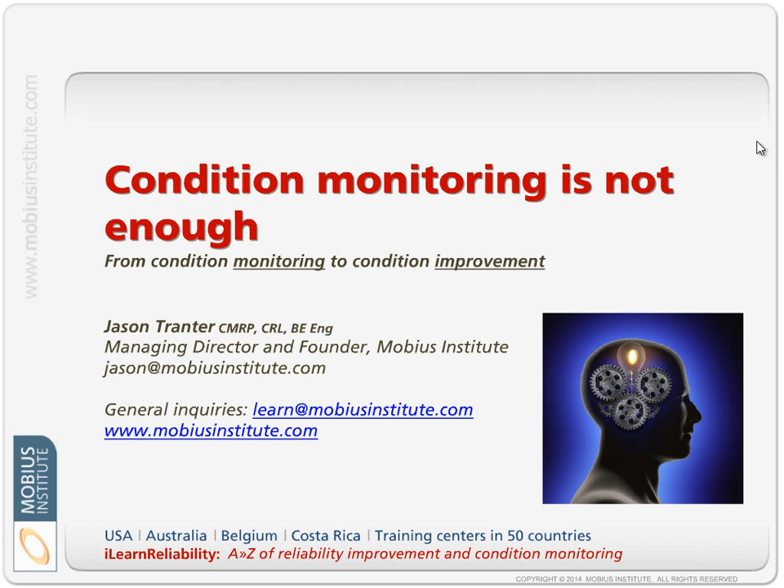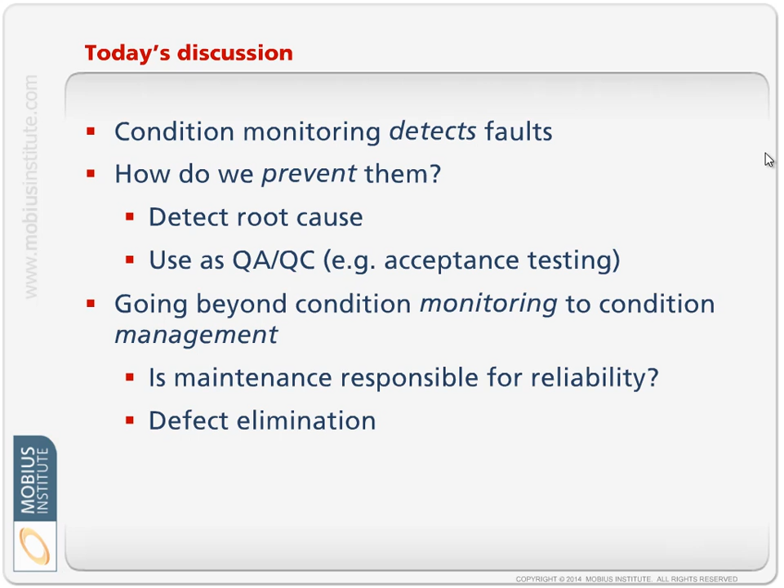In this presentation we're going to quickly summarize condition monitoring, the benefits of performing it, and its traditional role. Then we'll look at not only detecting faults but how we prevent them in the first place. We'll look at root cause failure analysis, using condition monitoring as a quality assurance and quality control process, and then we'll look at how we go beyond just condition monitoring to condition management, and explore the topic of defect elimination.

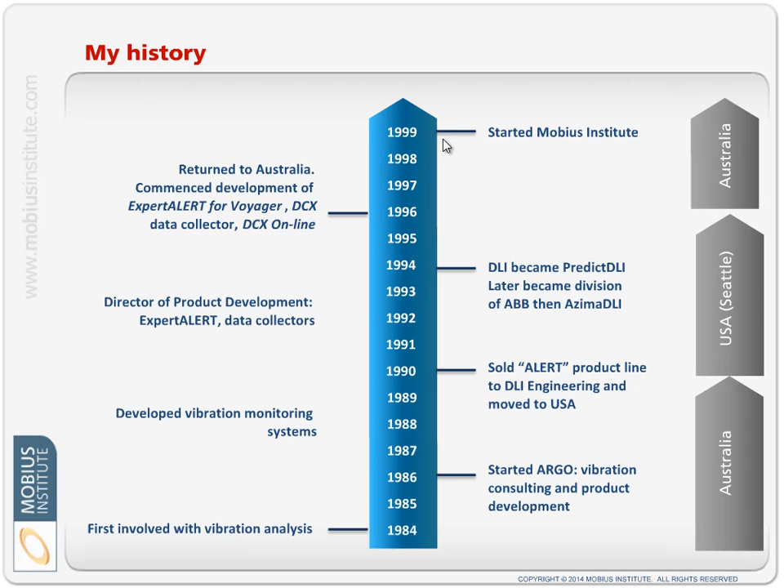Very briefly, so you understand where I'm coming from, I've been involved with condition monitoring since 1984, in a variety of roles, from running my own company in Australia to working for a company that developed condition monitoring systems, to starting Mobius Institute, which is involved in providing training in the area of condition monitoring. Our business has been going 15 years, and over those years we've developed various training courses related to condition monitoring and reliability improvement.

Particularly in more recent times, we've taken our reliability improvement ideas and put them into a product. The point I'm really trying to make is that over those 30 years, I've seen a lot of companies try and run successful condition monitoring programs, and a lot of companies really struggle to run their condition monitoring program as well as perhaps they should. They're not getting the returns they'd hoped from condition monitoring, and we'll explore a couple of those points as we get through this presentation.

The other major observation through this time is that most people really focused on detecting faults and providing a warning that a machine was failing, but not necessarily focusing their attention on the area where they would get the greatest return on investment, and that is on eliminating the root causes of those faults that they were detecting with their vibration analysis systems or infrared systems and so on.

So, condition monitoring. What we're really trying to do is minimize risk through early fault detection. As you're probably aware by now, rotating machinery, electrical equipment, and other process equipment give off a lot of telltale signs that there is a problem developing, and if we catch those signs in enough time, we can then react to them.

But in general, if time is being spent to inspect a piece of equipment to determine its condition and the necessity for maintenance work to be performed, corrective actions or whatever, that to me is still basically condition monitoring. We're monitoring the condition so that we can react, and that's a key word here really - we react if there's a problem detected. And performance monitoring certainly fits into that - if we can see that the pressure or flow is not adequate, well, that's a condition that needs to be remedied.

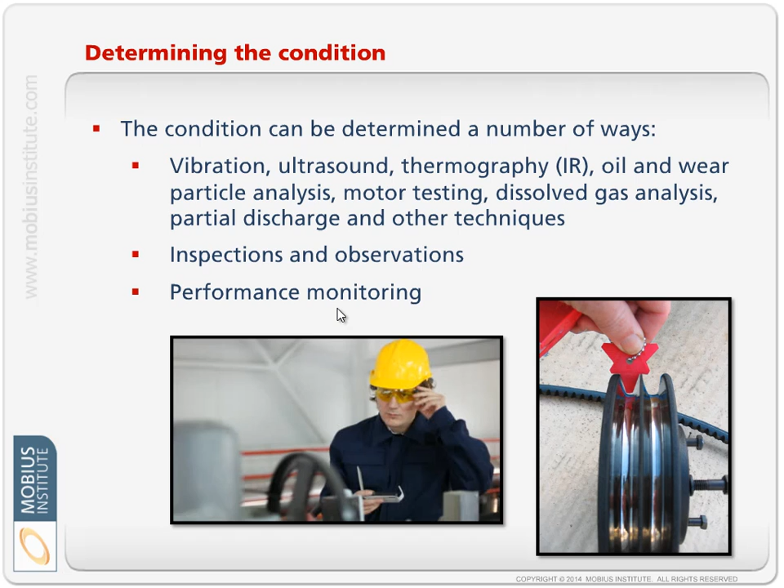Okay, the basic principle behind condition monitoring is that we will run for a certain period of time when the equipment is running in its normal, healthy state. We could say that it's running defect free, but let's just say that the defects in the system, the inherent unreliability, hasn't yet caused any faults to begin to develop.

Other technologies are going to pick it up earlier, but of course it depends on the failure mode and the type of equipment. What we really want to do is pick it up as early as possible. The earlier we pick it up, the lower risks associated with the equipment and the lower cost of dealing with the problem. We have more time to plan it when it is convenient for us to deal with the failing bearing or whatever the problem is.

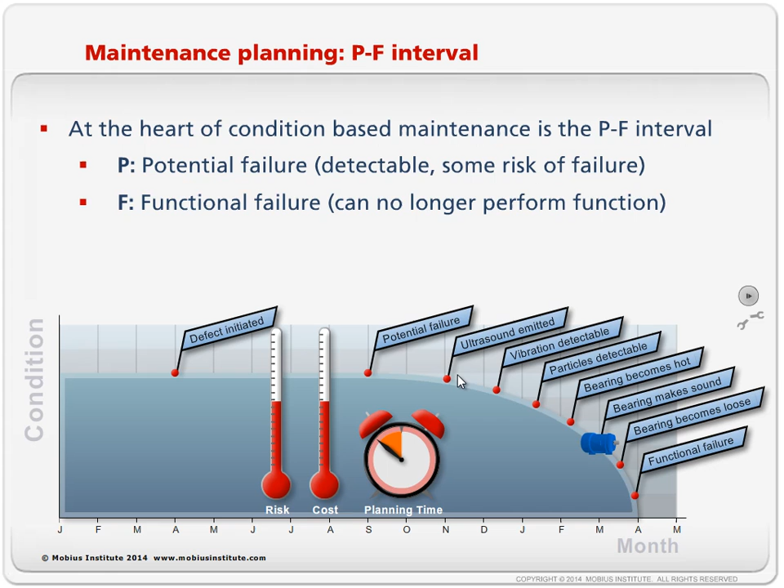But that's the core principle behind condition monitoring, and as long as we take enough measurements to at least plan to take two within this PF, F being the functional failure, if we plan to be taking two measurements in that period, then we should detect it and be able to respond. We may take more measurements during that period, and that gives us a higher likelihood of detecting it earlier. And then the other key is to use those technologies properly, but that's not really the point of this presentation.

So, what are we doing with condition monitoring? It is there for fault detection, not when it has catastrophically failed, of course. We're trying to get that early warning. We can use that information to improve our maintenance planning.

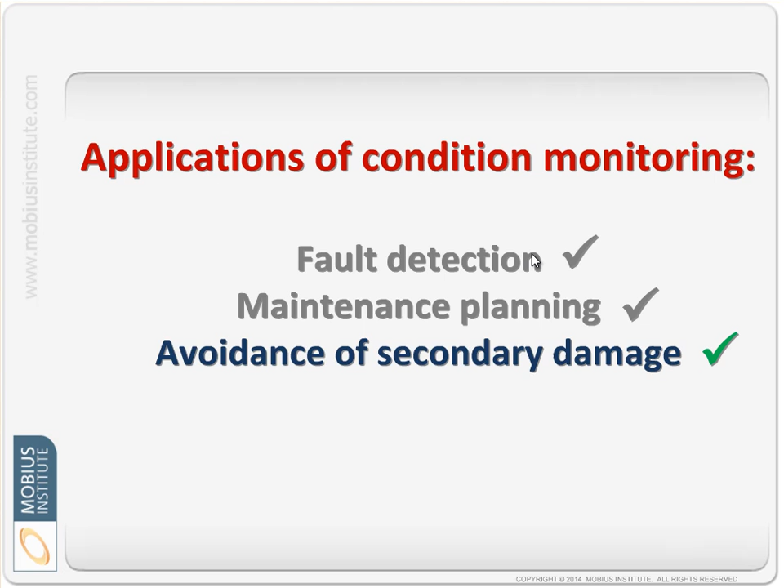We can avoid secondary damage or collateral damage. If the bearing failed, maybe the shaft would be damaged as well, or a seal would be damaged, or there's secondary damage, and we get to avoid that.

If we're doing a good job, we can reduce our inventory of spares because we have more confidence that we will detect it early enough that we can perhaps order the spare that we need, the replacement piece of equipment that we need or part, and we know we have enough time to get that into our stores. So rather than having it on our shelves, which is costing us money, and there's the potential for that part to degrade over time, we get to save some money.

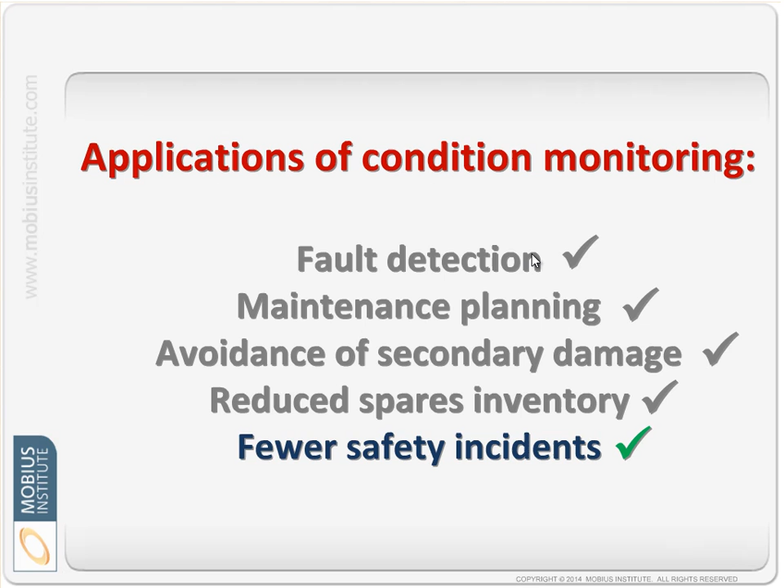And there are fewer safety incidents as well, both in terms of the equipment failing, which can have a ripple effect both from a safety and environmental point of view, but because we can plan our maintenance better, we'll have more time to plan the maintenance and we'll have a better idea of what's wrong with the machine. There's less time spent with the machine, and that reflects an improved safety situation.

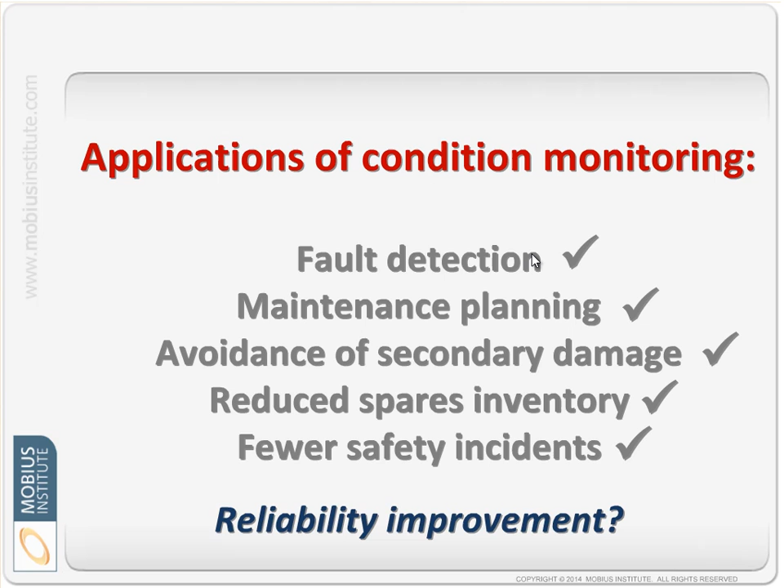But the question is, what does all of this have to do with reliability? Most people feel, well, condition monitoring, and I'll put the emphasis on the word monitoring, does it improve reliability? Well, certainly if you look at it from the point of view of, are we having as many failures as we used to? Is that your sole measure of reliability? Well, from that perspective, yes, we improve reliability of the plant.

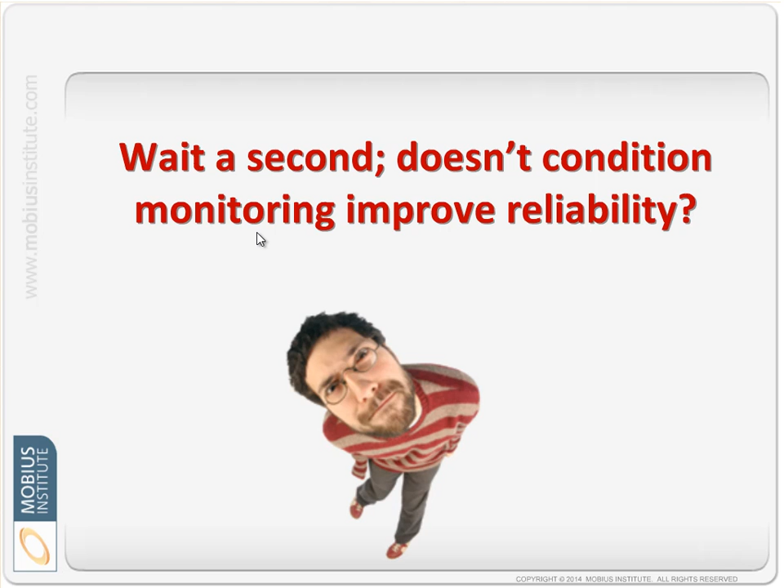We can make plans because we have a higher likelihood of having less downtime, greater availability, and so on. But are we improving reliability? What have we been discussing so far? We're really managing failure. We are detecting problems, or fault conditions that for the most part just should not exist.

Okay, if you've been running the machine for the last 15 years and finally we detect a bearing fault or something, we say, hey, it did a good job. We're happy with this situation. But that's usually not the case. It's not 15 years later that we're detecting a problem.

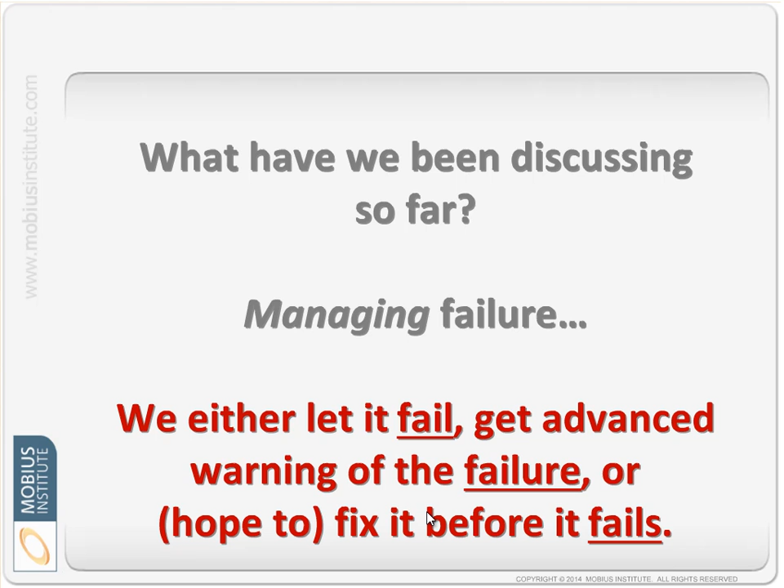It is much sooner. So we're either letting it fail, and we might choose to do that because of the criticality of the equipment or the demand on production. We get advanced warning of the failure, and we hope to fix it before it fails. But the emphasis is on failure. And so even though we like to talk about reactive maintenance being separate to condition-based maintenance, it's pretty easy to actually call what we're doing reactive maintenance. Sorry, it's just that we're reacting earlier.

Now we perform our condition monitoring at the correct rate because we don't know when this fault is going to occur. It is still random failures, but if we're taking care of all the reasons why it would prematurely fail, then we will get many years of service out of this piece of equipment, and then finally when it starts to fail, because the bearing finally develops a spall or something else occurs, then we use our condition monitoring techniques to detect the problem, and we plan it again as early as possible. So that's the key. We just want to keep it running in that defect-free mode as long as possible.

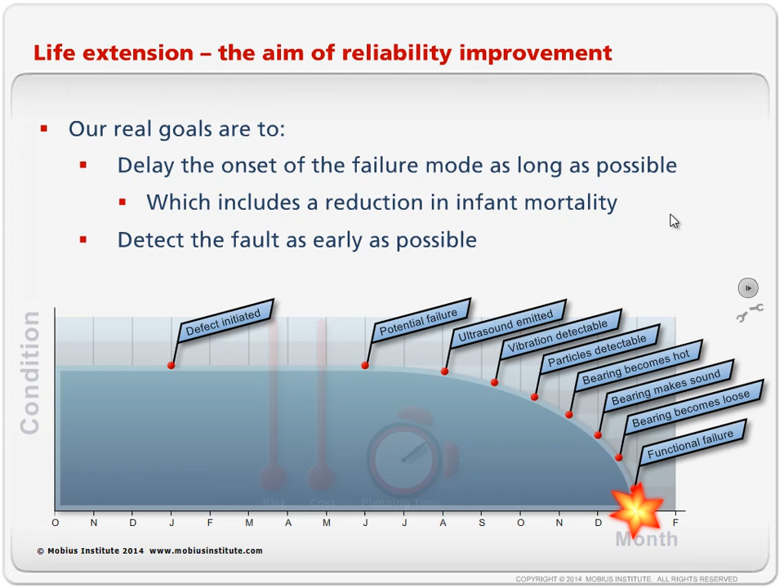With everything, there's an economic justification that's required. Are the steps required to improve its reliability, or let's say avoid the degradation of its inherent reliability? Can you justify that? Can you justify the condition monitoring? Those are important questions to ask. In the vast majority of situations, the answer will be yes, because those failures have a real ripple effect through the business in terms of safety, availability, the maintenance costs, and so on.

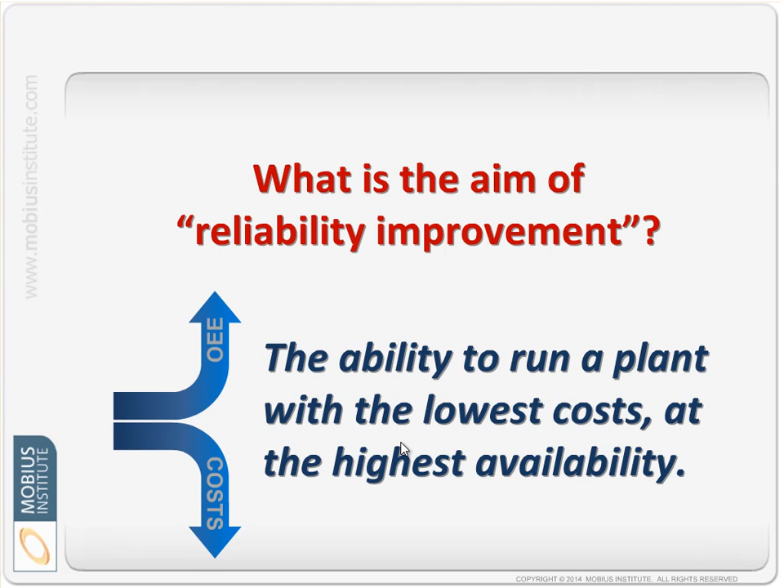So let's have a look at reliability improvement in more detail. When I talk about reliability improvement, there's a recognition, number one, that because of the equipment we purchased, we may not have designed and purchased the best equipment for the lowest life cycle costs, but it is what it is. What we don't want to do is degrade it further through our maintenance practices and operating practices. What we want to do is run our plant with the lowest costs possible, and no, that doesn't mean we're going to fire all the maintenance people or do something silly like that. There are ways to reduce costs and increase the OEE. So we're going to reduce our costs and have the highest availability possible, and we can in turn actually increase our plant capacity as well. More we could say about that, but that's really what I'm referring to when I talk about improving reliability.

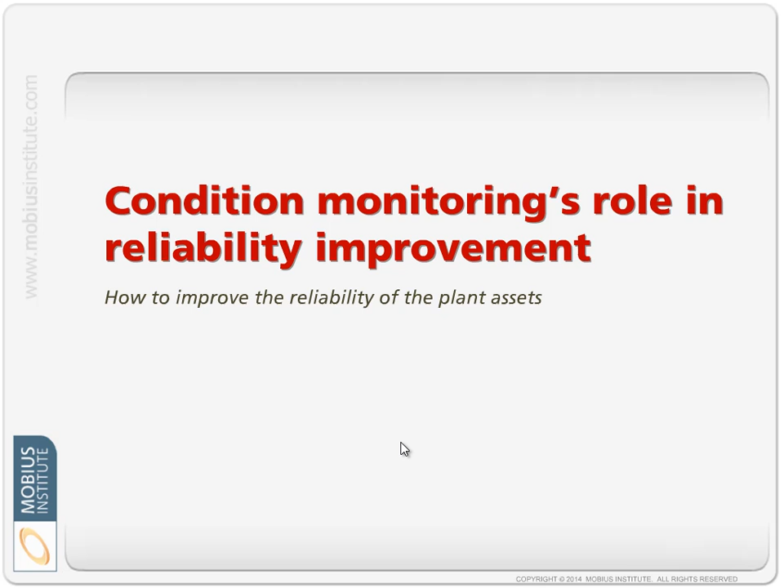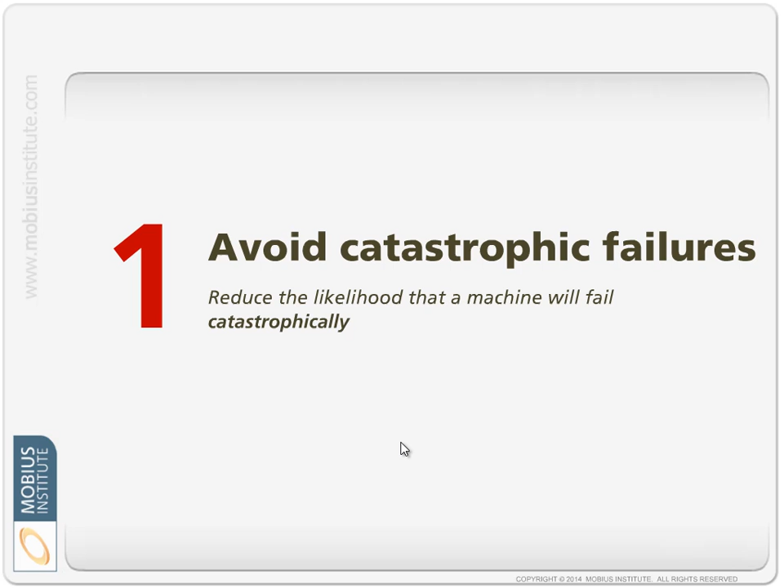So what is the condition monitoring group's role in reliability improvement? Well, as we've discussed, we're trying to avoid the catastrophic failures, and that's a pretty simple one, and that's the general thought when people think about condition monitoring, so we won't dwell on that any further.

But what we also want to do is use condition monitoring to detect the root causes of faults. Now, I'm not talking about performing root cause failure analysis. That is an important ingredient which we'll get to, but we want to detect the conditions that will result in failure, in reduced reliability, and take proactive measures.

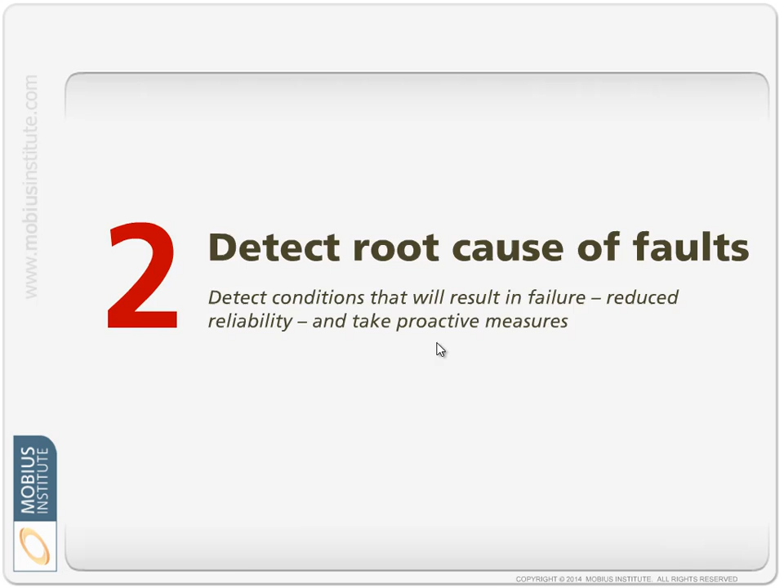So if you think about all these factors: unbalance, issues related to poor installation, misalignment, soft foot, resonances, loose foundations, poor lubrication, poor operating practices, etc. All of those forces being applied to the machine. Poor lubricant increases the friction. Operating it incorrectly puts all kinds of loads on the bearings and seals and shaft and so on. Unbalance, etc., etc. They all result in bearing failure, reduced efficiency, seal failure, leaks and contamination, potentially fire, a number of faults.

So what we need to do from a condition monitoring point of view is detect when any of these things are going on. Detect that the machine's out of balance, or that the bearings have been installed incorrectly, or that it wasn't aligned properly. If we detect those issues and then correct them, then we are less likely to detect bearing faults. That's the aim, and that's what the condition monitoring group can do.

Now, the reliability culture of the plant needs to change so that when the condition monitoring person says, I'm detecting unbalance here, and no, it's not that high that I'm concerned about the machine ripping itself apart or something like that. It's not so high that it's affecting the process or upsetting people working in a nearby office or something like that.

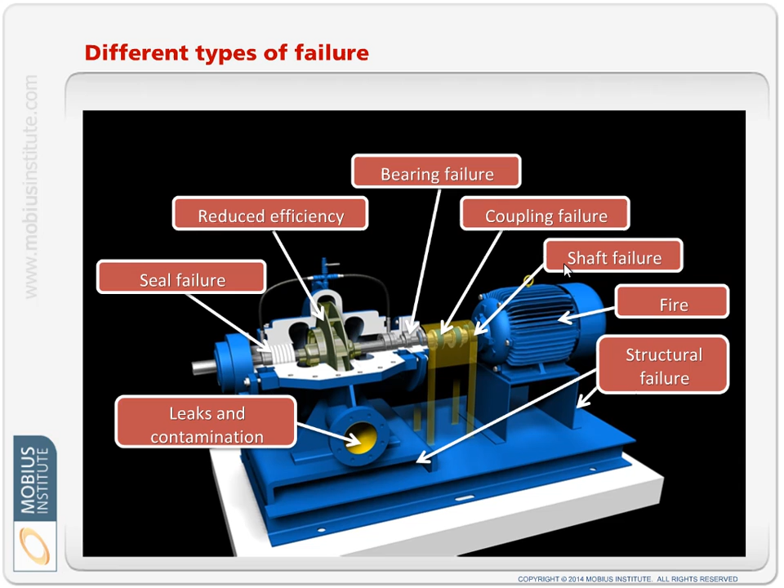We know it will reduce the life of the equipment, and there's a lot we could say about that. But people need to take notice of that. People need to act and say, we do not want to operate this machine in that state, and if an opportunity presents itself—either because you have redundancy or there is a plant shutdown for another reason—if you can balance it, realign it, or correct any of these issues, then you do.

And there's even more we can do. For example, we can use oil analysis and wear particle analysis to check the lubricant health. We can see if it's contaminated, if it still has the correct levels of additives, if it's got the right viscosity. We can check that the bearings and gears have been properly lubricated. We can check if there's looseness, check for resonance, check for unbalance, misalignment, bent shaft, etc. We can check if the bearings have been installed properly, if there's cavitation. All of these factors can be tested with condition monitoring, and if we correct those conditions, we will improve reliability.

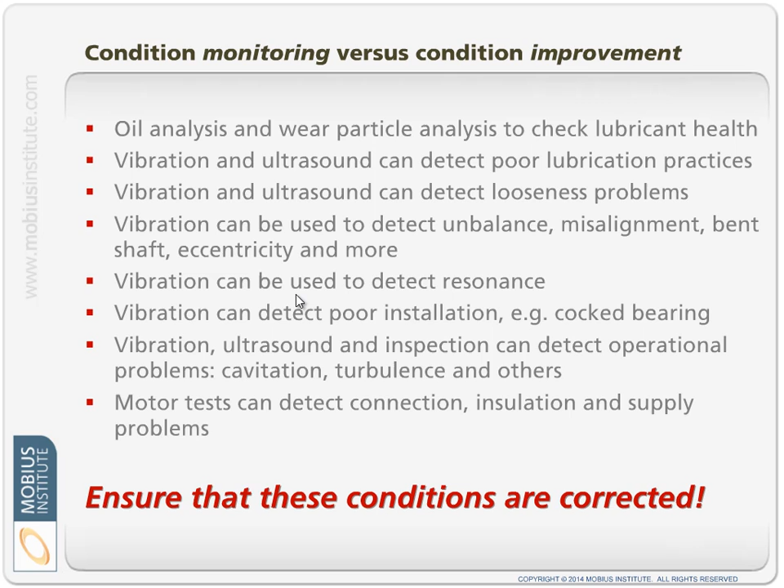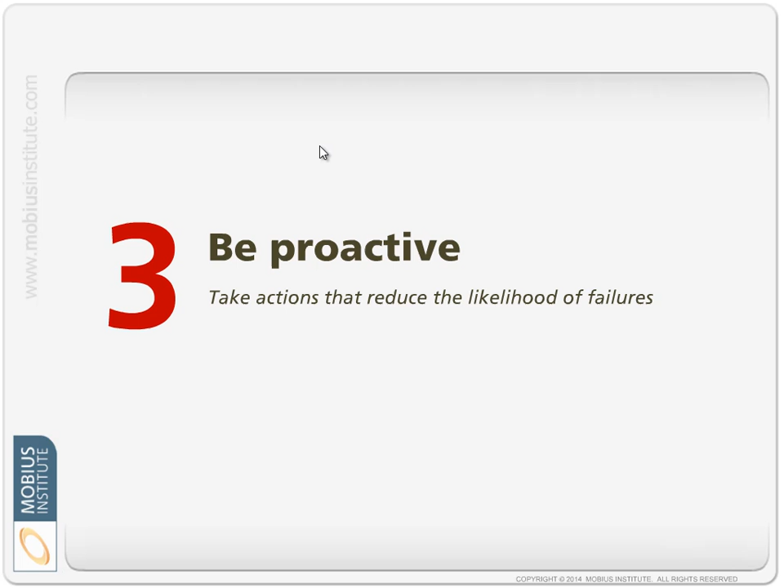Now, as I said before, we're not improving the inherent reliability—we're not redesigning the machine or replacing it—but we are not going to degrade it further with these sorts of issues. Now, that is still reactive, but it's somewhat proactive. We're detecting the alignment problem and then we're going to do something about it. But to be even more proactive, we want to reduce the likelihood of those problems ever developing.

So we are going to precision balance to G1.0. We're going to precision align the belts and shafts. We're going to perform precision lubrication. We're going to eliminate looseness, optimize tightness, minimize resonance, and improve our installation practices. And the point is, rather than detecting the unbalance problem and then having to deal with it, if we have good balancing and alignment practices in the first place, if people have been properly trained, then these faults won't develop.

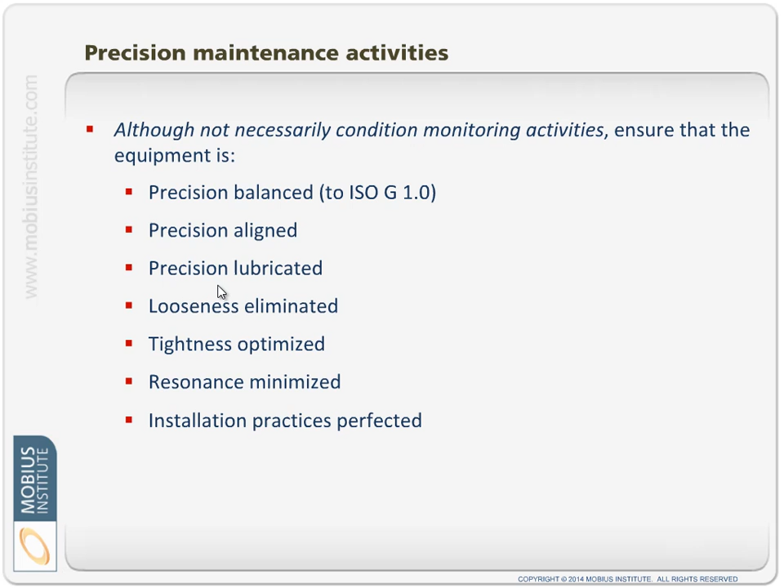Now, with some processes we can't avoid it. There might be a build-up of material on a fan—it's part of the process, we can't avoid that. Okay, we look for the unbalance and we correct it, we clean the rotor, we clean the fan blades, and balance it if necessary. Some things will develop over time. Our condition monitoring though can detect that and we can remedy it. But at all times we need to think back: well, was there a way to prevent this in the first place?

So, certainly with balancing, you can perform in-situ balancing, and you can balance to a very high precision so that the unbalanced forces are minimized and therefore the bearings feel less of those forces. But what's important is if you are going to do shop balancing, or you're going to have a consultant come in and do in-situ or in-place balancing, you must say to them, we want G1.0, and we want you to prove that that's what you've achieved.

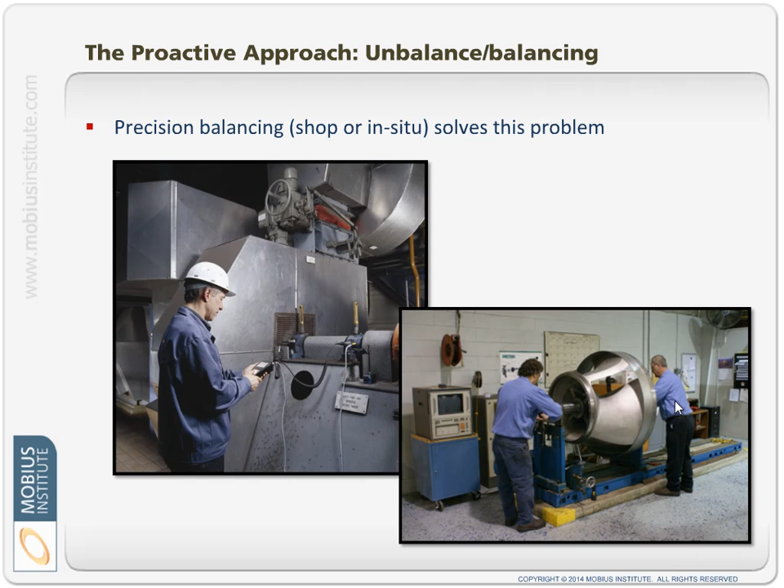If you get blank stares, then that's a bit of a worry, and that can be the case sometimes. People don't really appreciate what that means. There's a lot of misunderstanding about that, in fact. And then, you might balance the rotor, but you have to make sure that when the machine is reassembled and the keys are in place and so on, that it is still balanced. A lot of things to understand with that.

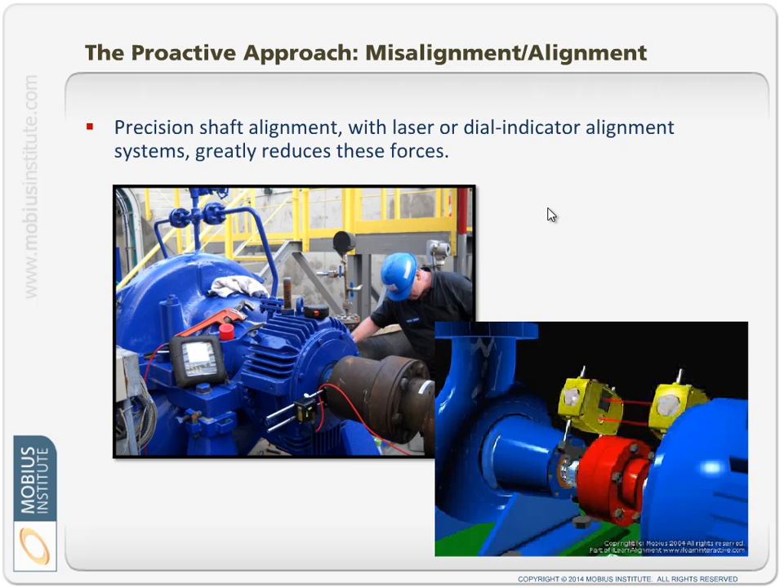Same with alignment. People think, oh well, I've got a laser alignment system, I am precision aligning. No, you're not. You're precision aligning only when you've defined what the tolerances are and you've achieved those tolerances. Just having laser beams involved does not mean precision alignment. Same with belt alignment—it's important that we align those belts properly. Installing bearings, there's training you can receive to understand how to do that properly and how to remove the bearings properly.

Generally speaking, people do want to do their jobs properly, but they haven't been trained to do it properly, or they haven't been given the tools to do it properly. That has to change. If the bearing is installed properly, there's a far, far, far higher likelihood that it will operate for a much longer time.

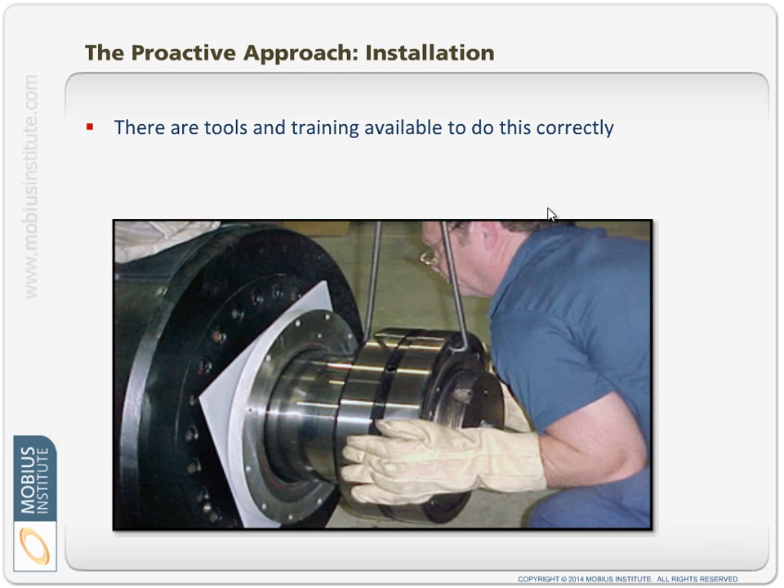All of these topics we could talk about for a long time, especially lubrication. The way lubricants are stored, filtered, and dispensed is all very important. Filtration, when contamination occurs if it's unavoidable, using desiccant breathers or other ways to reduce moisture getting into gearboxes and reservoirs, and ensuring the correct lubricants are dispensed to the correct machines and reservoirs.

The greasing process for bearings needs to be looked at carefully, and perhaps the use of ultrasound would help. All of these things, it's not rocket science. This may involve a little bit of money to go through this process, but it will pay dividends. It will absolutely pay dividends.

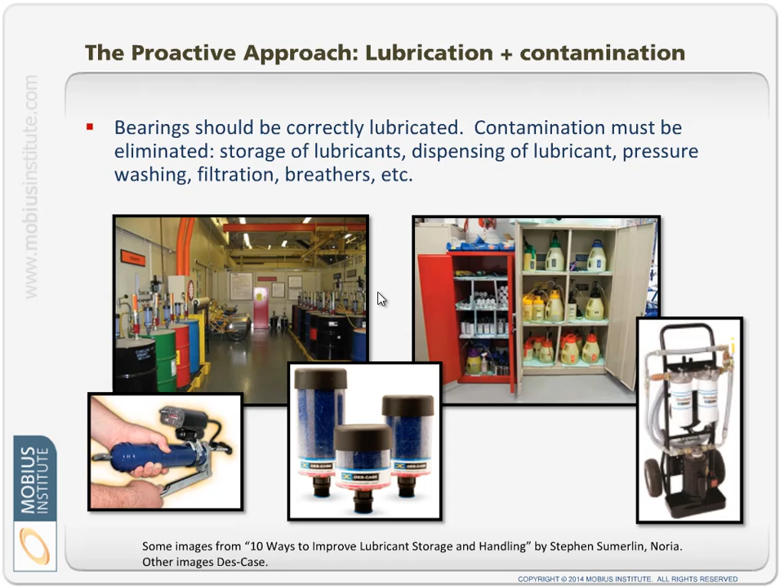At this point we're eliminating faults. We are detecting signs like unbalance that might lead to premature failure, and we're involved, where possible, in making sure we do balance properly and align properly and so on. But there's one more thing you can do, and that's acceptance testing.

There's an assumption in many industries that when you buy equipment, a new fan or a motor or whatever, that it is in perfect condition, in the ideal state for your plant. Unfortunately, that is just a mistaken understanding. It is just not true.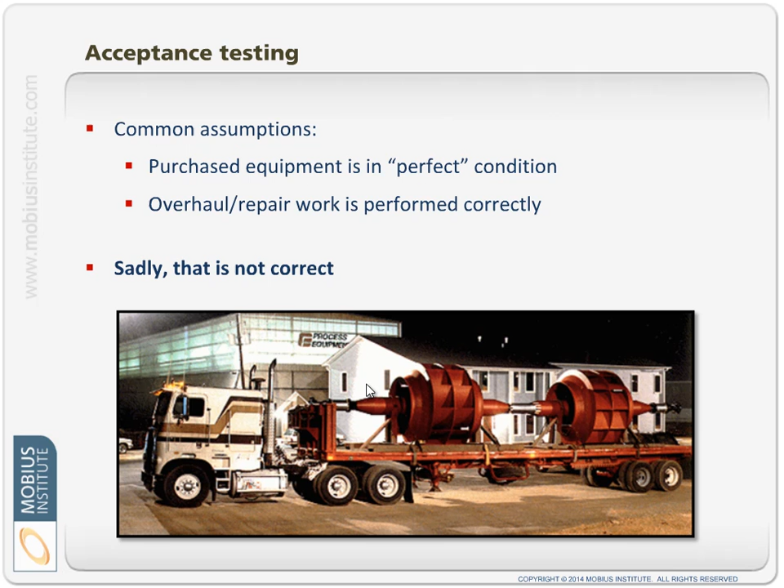You need to say in advance what you are aiming for. You need to set the bar higher so that from a design point of view you design for maintainability and reliability, and the procurement process can only purchase spares and replacement equipment that meets your higher standards. Because if you make sure you're getting quality spares and new equipment in the door of your plant, you will have a much improved reliability picture as a result. It's really important to understand that.

You shouldn't assume that what you're buying is in good condition. What we can do is not only set the specifications from a design point of view, but also the tests you will perform to prove it has met those requirements. In the simplest case, they can just be vibration readings—you can say you will not accept vibration readings over a certain level.

It should be spectrum based. You should be saying at these frequencies, these are the amplitudes, and there should be no sign of any bearing frequencies, etc. We could talk in much more detail about all of this, but the bottom line is you can set requirements.

You can look at testing motor rewinds and motors in general. You can test lubricants—there are all sorts of tests you can do. Those tests could be performed by the vendor or by you. That's an agreement you have to make in the first place, but you certainly have to define how the tests will be performed and the qualifications of the person performing them.

The idea is to reject equipment that does not meet your standards. Not that you have ill will towards your competitors, but someone's going to get that motor or fan you reject, because you're saying no, it's not coming into our plant. Like everything, you may pay a little extra, and that's sometimes a bitter pill to swallow, but the life cycle costs will be dramatically lower. You will be purchasing equipment with a much better inherent reliability.

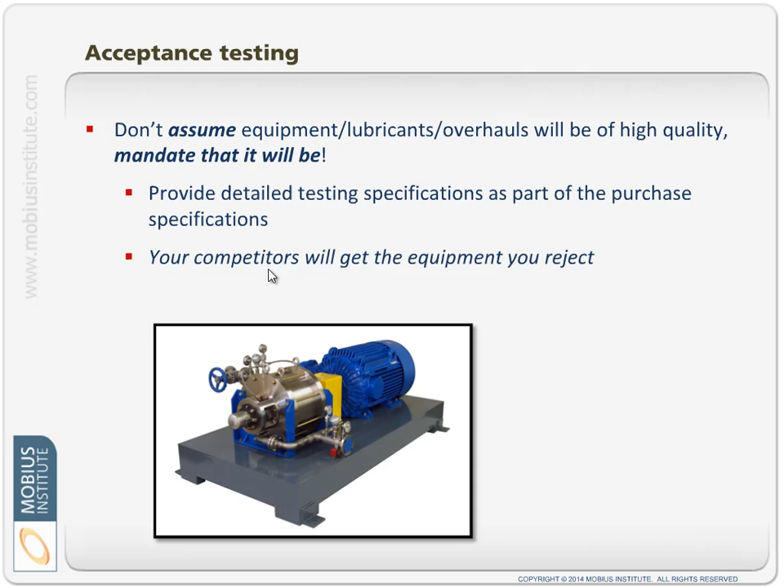So if we take good care of that equipment and have the right equipment in the first place, we will achieve all the goals of condition monitoring and improve reliability. So one challenge is, what should those standards be? How do you define what is acceptable?

There are a few approaches you can take. There are quite a few ISO standards specifically designed for acceptance testing. You will also find guidelines published for the automotive industry, the paper industry, and other industries.

And then there's also the question of your own industrial experience. If you've got a condition monitoring group that's been working for a while, they should be able to say what they would expect the vibration spectrum to look like when a piece of equipment is new. Now, it's not the alarm limits they would use to warn them if there was a problem. It's, we want lower vibration than that.

So there are certain things you can say, well, for this sort of size motor coupled to a pump that you're purchasing on a skid, you can say, well, I don't want to be able to detect resonance at all, I don't want to be able to detect any bearing faults. And you can go through that process, specify alarm limits, and just say, well, this is how the test should be performed, and if the vibration levels are any higher than that, then that's a problem and you won't accept it.

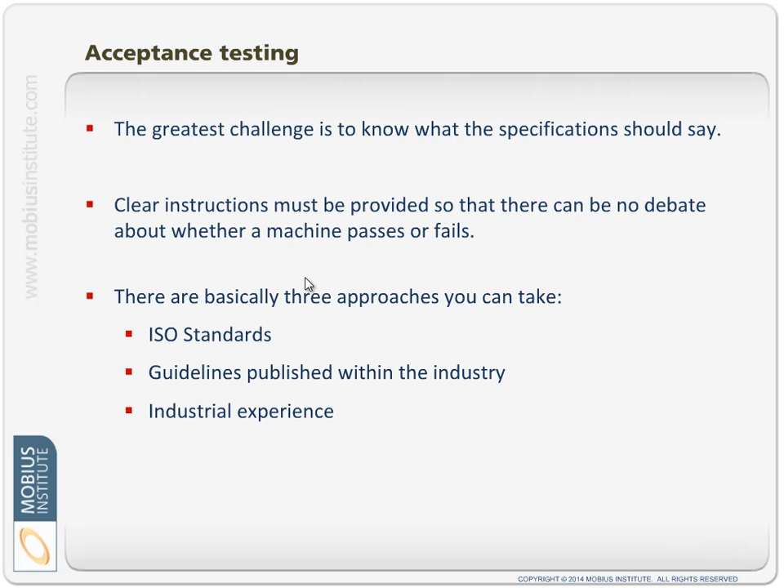There's a lot more we could say about this topic, but it is very important. And so we can ask the question, is there more we can do? Can we do more to eliminate the root causes? Really, some of what we've been talking about, in fact quite a lot of it, I would bundle together into the area of defect elimination.

Now, it is true that we can look at the principles of RCM and how we design our maintenance program, and if we take an improved view of RCM and failure modes effects analysis, we can understand the failure modes and think about the condition monitoring tasks and so on, and we can think about maybe improvements to designs, and think a little more broadly about what those root causes are.

But ultimately we want to stand way back and say, what can we do? We just talked a little bit about this - what can we do from a purchasing and design point of view to make sure that what comes into our company is the best thing for our business? We have to look at the people who provide consulting services, motor rewinds, balance jobs, and those sorts of overhauls and whatnot, to make sure they all understand what our requirements are for high levels of reliability.

And also, how is the equipment being transported? How is the pump or the fan or whatever it is being transported? Because we can introduce problems there as well.

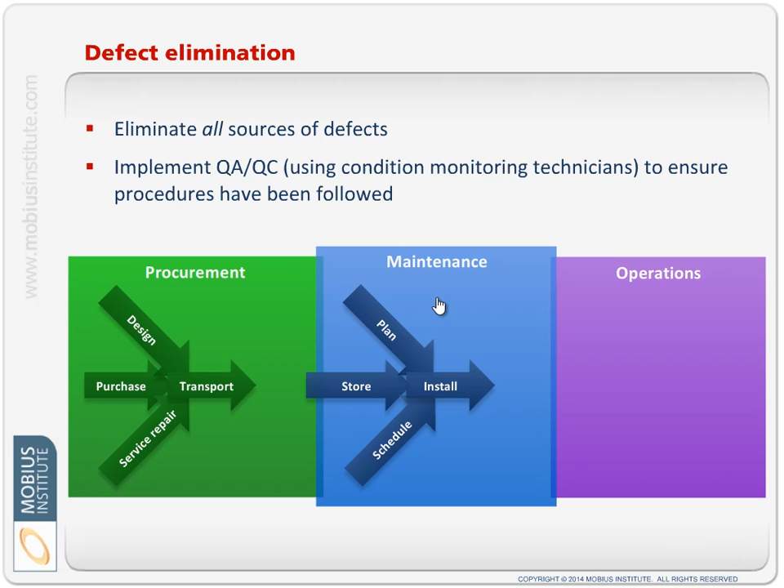Yes, those practices that we've discussed are a contributor, but we have to understand it's how we operate them that has a very large bearing on the reliability of our equipment. Now it's going to change from industry to industry, but please don't sit there and think, oh, but not in our plant, that's not an issue. Make absolutely sure that's true before you make that assumption, because in many studies that is actually proven to be the largest source of reliability issues, the reasons why equipment fails prematurely.

But when we're operating the equipment, we do need to look at the lubrication process, and we need to look at all those things we talked about before - the alignment, balancing, and elimination of resonance, and all of that with our rotating equipment.

But we can't just aim to do all of these things and assume that it will therefore be done. We need to use that acceptance testing, the quality assurance, quality control. And again, that's where condition monitoring comes in. Condition monitoring comes in a few areas, but condition monitoring to do acceptance testing - this is another form of acceptance testing - looking at how the equipment was installed and checking: are the bearings okay, is the lubrication okay, is it balanced, aligned, can I detect resonance, etc., etc.

And then, of course, on an ongoing basis, we're going to keep on performing those tests to detect failures, but also to detect root causes of those failures—lubrication problems, operation problems, alignment, balancing, and so on. And if we can do these things, then we will improve reliability.

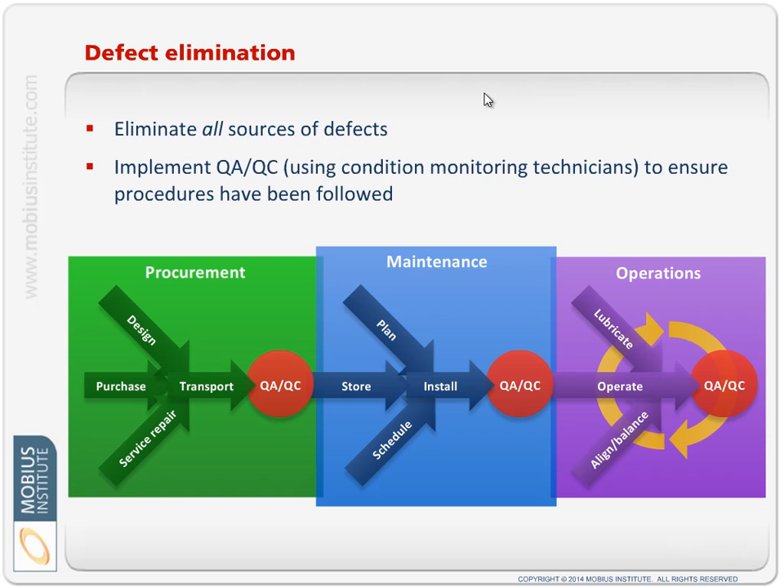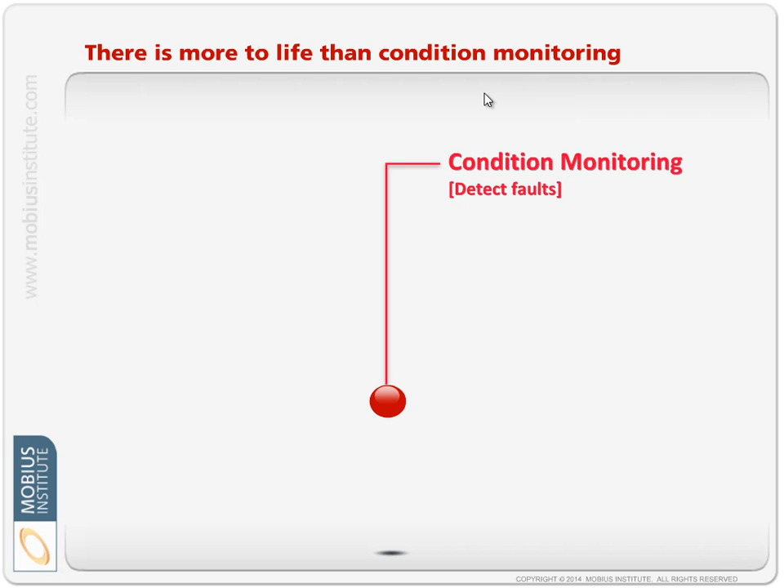Anyway, so wrapping it all up, there is no doubt that condition monitoring used to detect faults is vitally important, and if you're not doing it, you need to do it, and you will see a reduction in equipment failures.

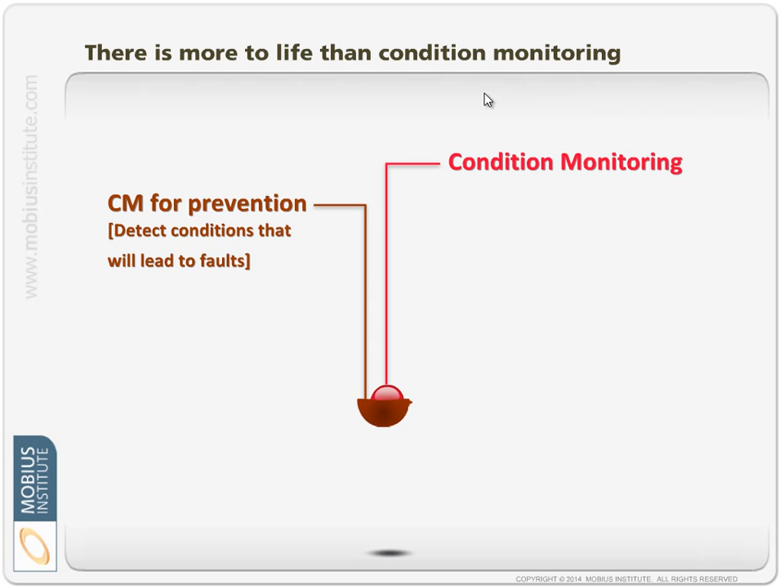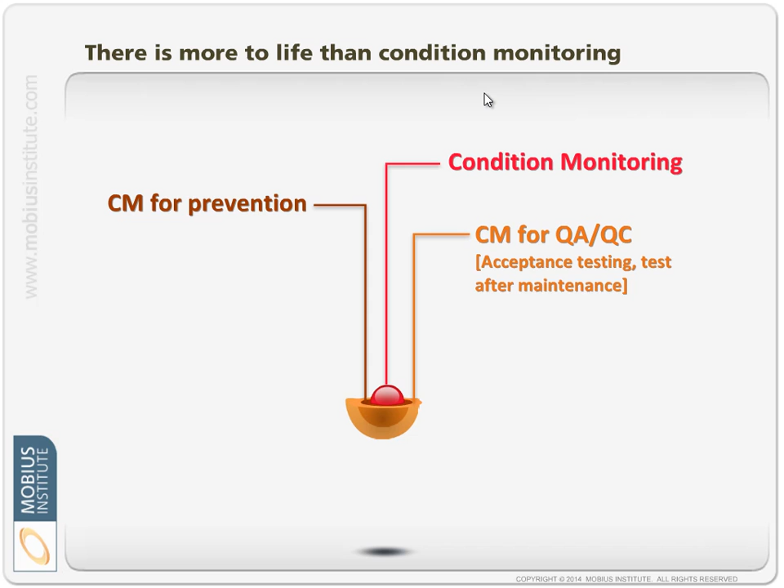But the next step is to say we want to prevent those failures by detecting the conditions that lead to it—the unbalance, misalignments and whatnot—and we have to take some action. Then we're going to use our condition monitoring skills in quality assurance, quality control, acceptance testing, testing equipment after it's been installed, and then ongoing condition monitoring.

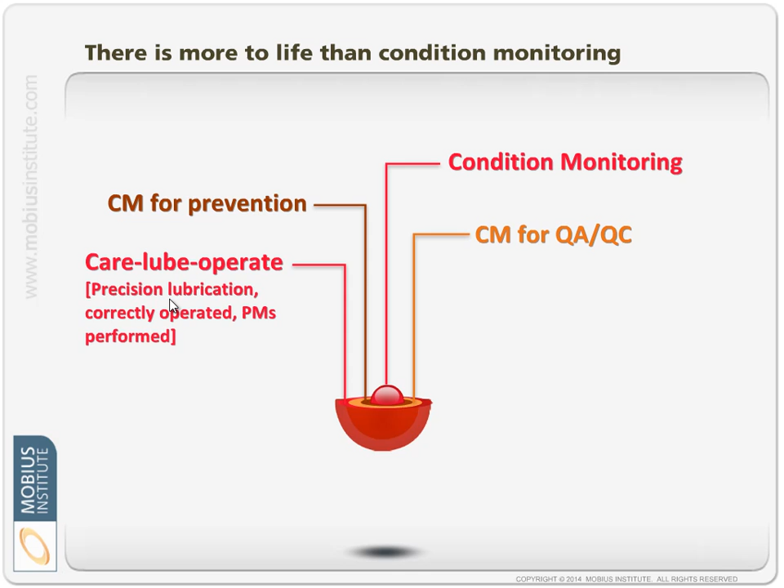But we have to look at things like the way we're operating the equipment, lubrication and other care, cleaning it and so on. We have to see how we can engage with the operators to even perform some of these monitoring tasks and potentially lubrication tasks and other tasks that let them get more actively involved in the care of the equipment that they work with. Operator-driven reliability is generally what that's called.

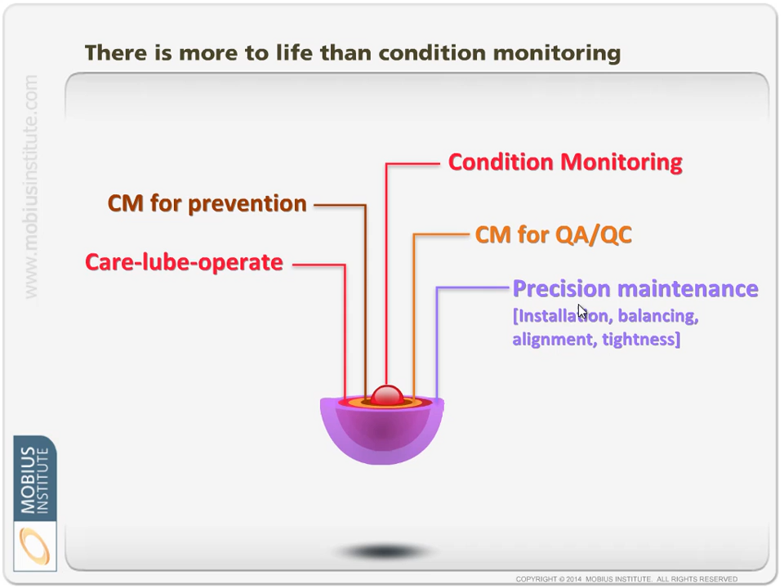But then we can get into the broader question of precision maintenance—the way equipment is installed, balancing, alignment, tightness, resonance elimination, lubrication and whatnot, how we're storing spares, what we store and how we store it, planning and scheduling. All this leads to improved reliability and maintenance practices, which improves reliability, a reduction in costs, and fewer safety incidences.

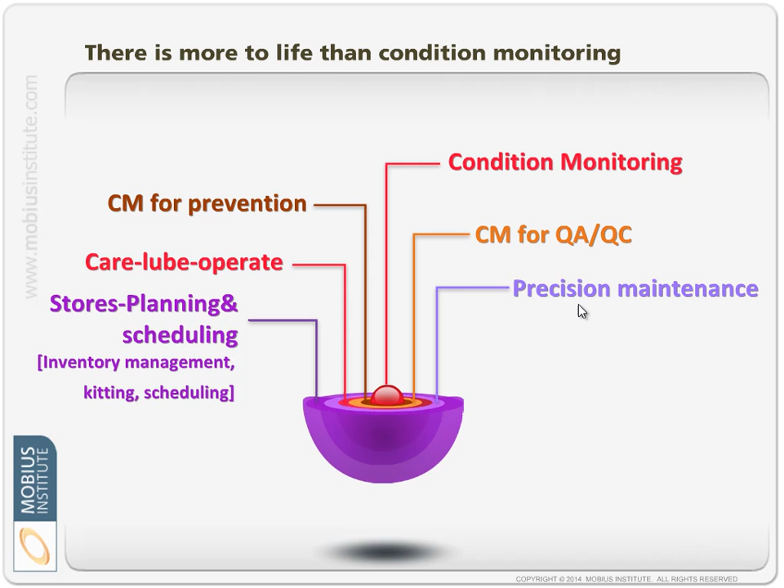It's obviously important. I mentioned already the transportation and storage—we can cause false brinelling, we can cause corrosion, there are other factors there. And finally, we stop anything from getting into the plant by designing for maintenance, maintainability and reliability, and purchasing for maintainability and reliability and reduced energy consumption.

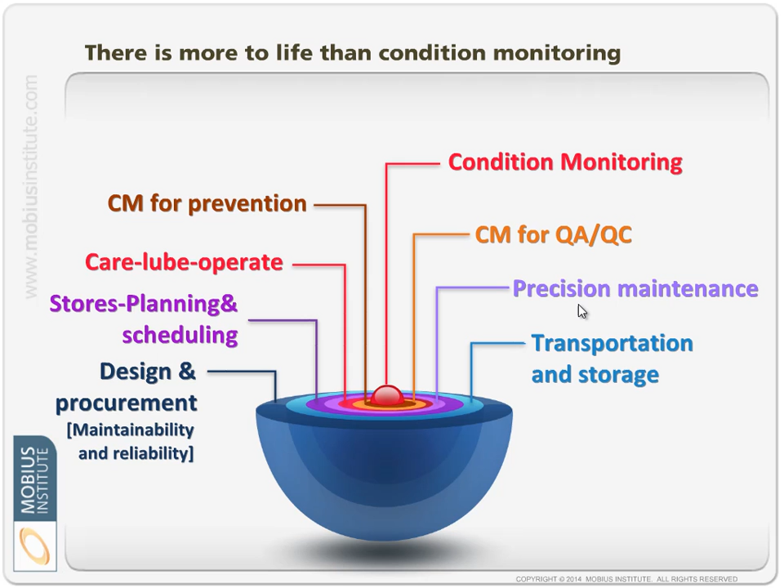We set the bar a bit higher so that yes, they can save money, but anything they purchase will give us the lowest life cycle costs. We don't save a little bit on that front end and then pay for it later with increased energy costs or repeated failures of that equipment.

Well, that concludes my presentation. I hope you found it useful.